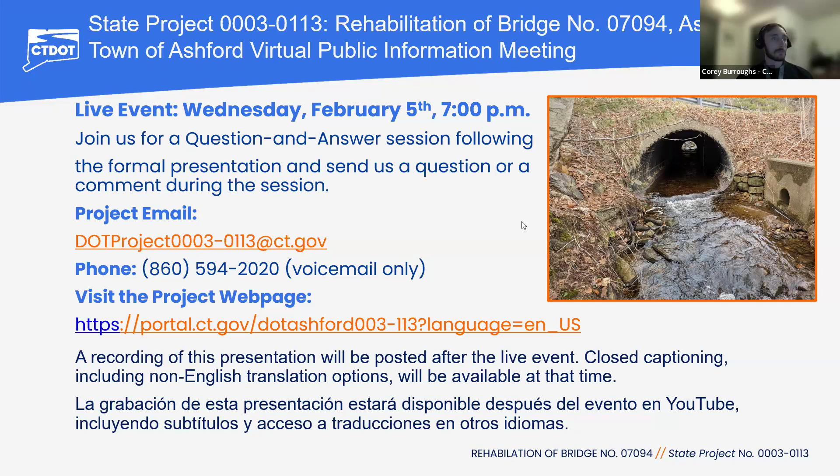The Title VI Civil Rights: no person shall, on the basis of race, color, or national origin, be excluded from participation or subject to discrimination in the development of this project.

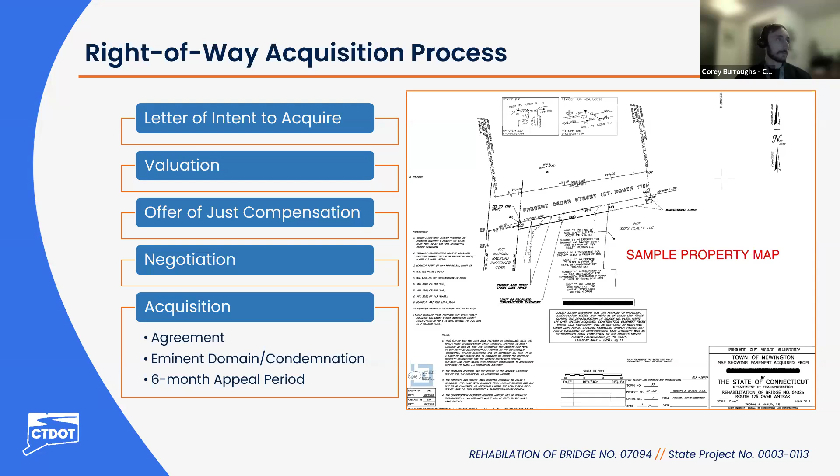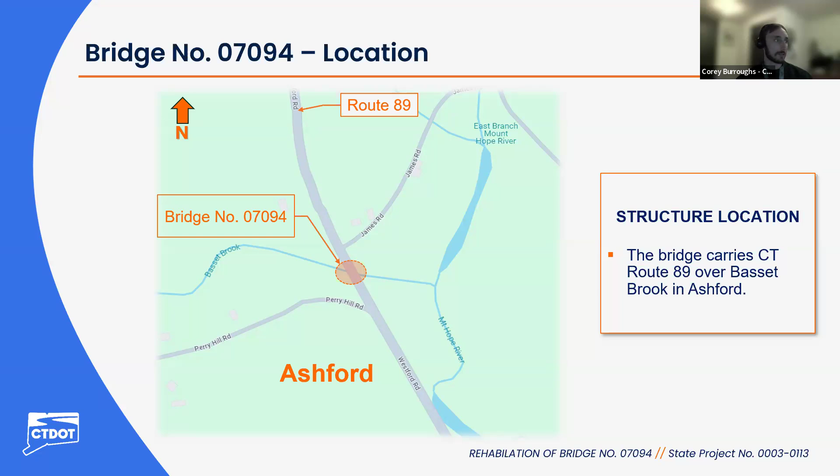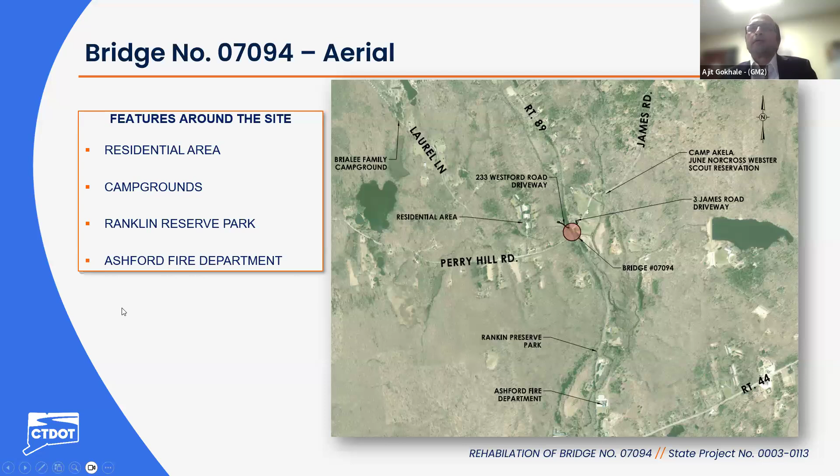It is bridge number 7094. It was built in 1958. The existing structure is an ACCMP pipe, an arch-shaped pipe. ACCMP basically means asphalt coated corrugated metal pipe. It is 8 foot 10 inch wide at the base and 6 foot 1 inch high, and it's 98 feet long.

Route 89 over the structure carries 2 lanes, 1 lane in each direction. The average daily traffic is about 2,800 vehicles per day. The overall width of the roadway at the bridge is 38 feet, and the out-to-out width is 43 feet 8 inches. Next slide, please.

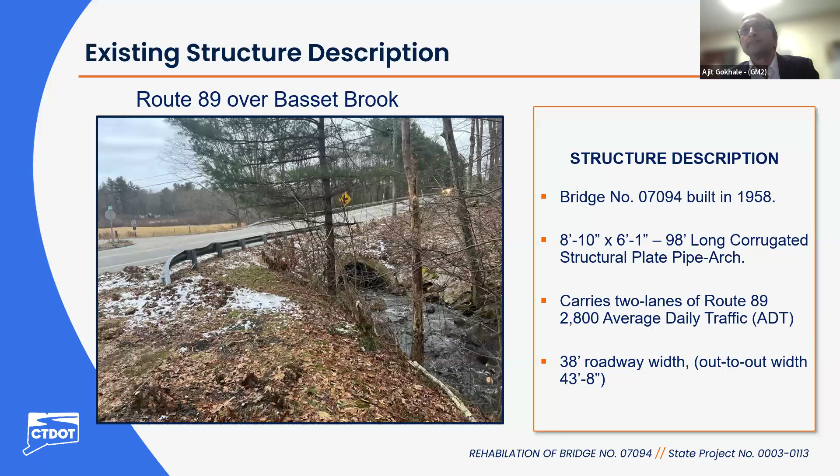What you see on the upper left corner is the inside view of the pipe, which shows some heavy rust along the joints. On the upper right corner, there is a portion which has a sort of a splice or a patch inside the culvert, probably done during the original construction of the pipe culvert. On the lower left, you see some portions of the bolt and the joint with missing coating and heavy rust along the interface from the vertical to the horizontal.

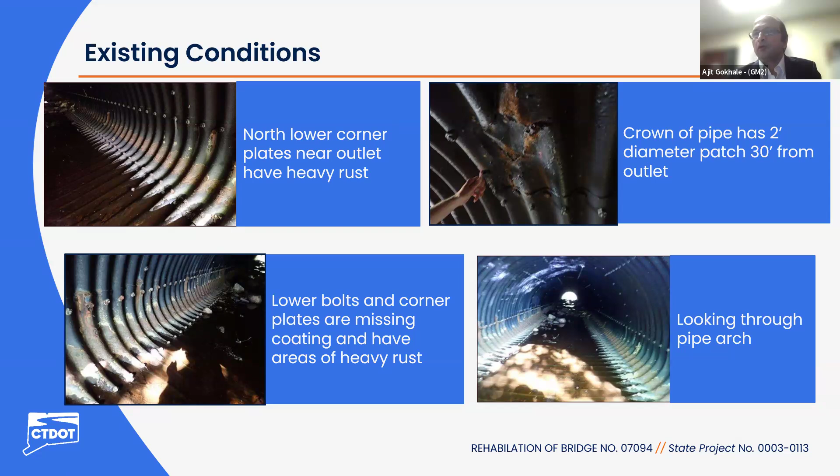The lower right is an overall view of the pipe seen from one direction. As you can see, the bottom of the pipe is severely corroded, and we want to address this problem in this project. Next slide, please.

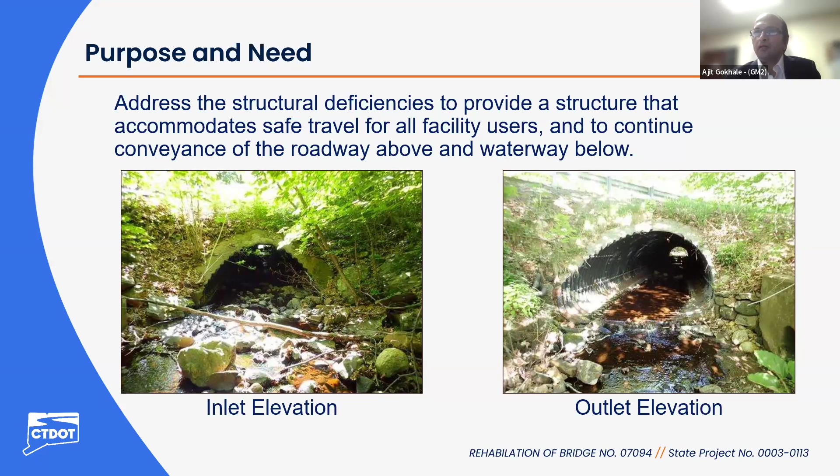So the purpose and need of the project is basically to address the structural deficiencies and to provide a structure that accommodates safe travel for all facility users, and to continue conveyance of the roadway above and water below. What you see on the lower left is a close-up view of the inlet, and on the lower right is the close-up view of the outlet elevation. Next slide, please.

The goals of the project: currently the condition rating of the pipe or culvert is 4. Any improvements or replacement we do, the condition rating will be improved to a 7, which is good to excellent condition. The other goal of the project is also to improve the hydraulic capacity of the pipe, in other words make it larger so it can allow the passage of more flow. Also maintain sufficient load capacity for all vehicles, so the new structure will be able to carry the live loads without any structural issues.

The solution here is to replace the existing culvert with a new precast concrete box culvert. Next slide, please.

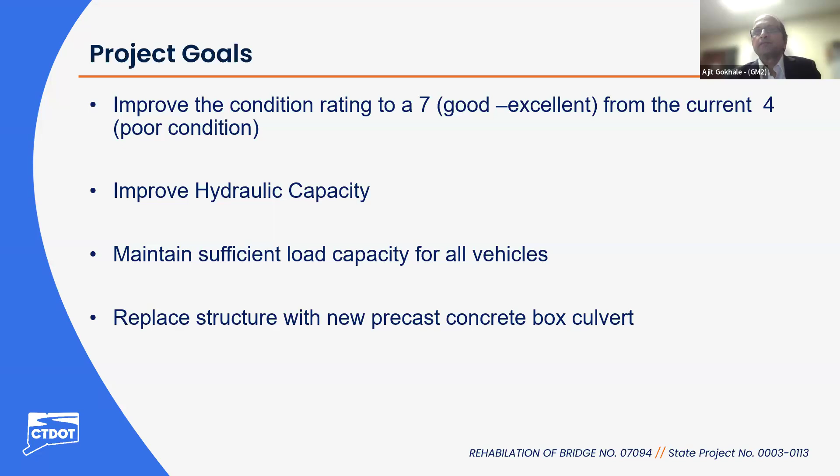So what you see on the screen is the overall site plan of this proposed project. The yellow basically designates the limits of the project along Route 89 as well as along James Road, and that is going to be new pavement, raised by about a couple of feet from the existing profile. The dark brown or orange in plan view is the new culvert structure that will replace the existing pipe. The little walls at the inlet and outlet are the wing walls of the structure, and the blue denotes Basset Brook, which flows from top to bottom, or upstream to downstream, north being towards your right. The red lines denote the existing right-of-way owned by the DOT, and our goal is to build a new structure within that existing right-of-way.

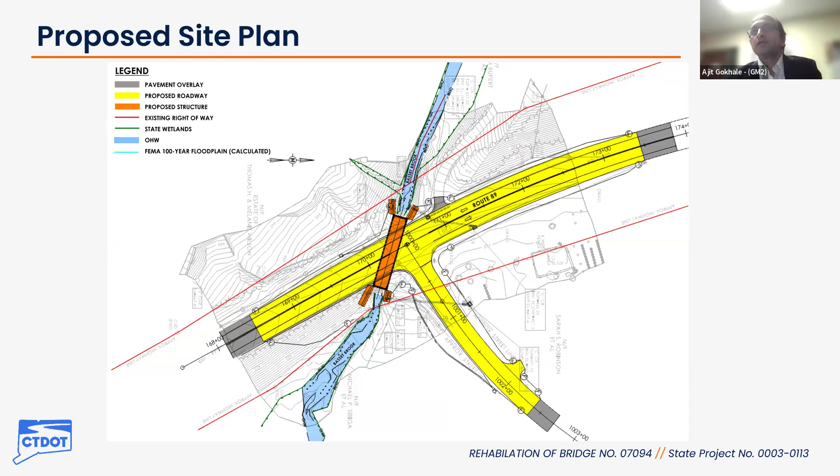This slide shows an engineering drawing of the site plan you just saw. In a nutshell, the gray denotes the limits of the new project and the new pavement, the light gray denotes the existing pavement, and the green denotes the proposed shoulder. The new shoulders will be widened, with this portion of the project having 7-foot shoulders compared to the existing 6-foot shoulders.

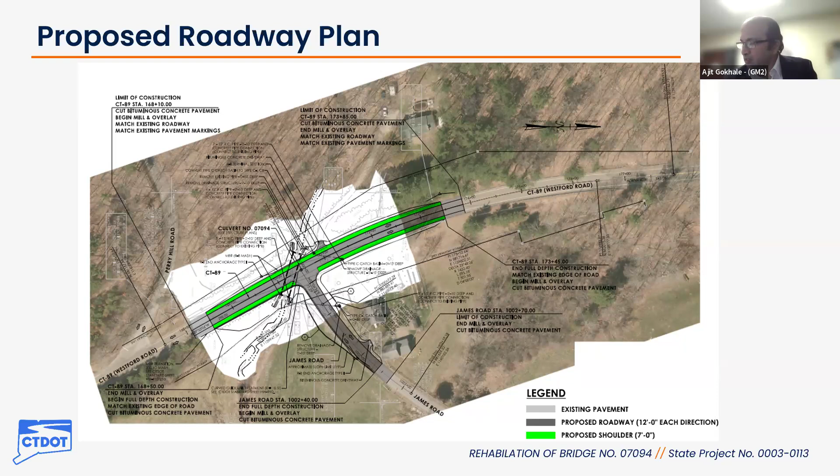This is a close-up view of the proposed culvert, what you saw in an earlier slide, just zoomed in. This is going to be the new box culvert, 15 feet wide by 8 feet high, which is the clear opening inside. You can see the four wing walls, one at each corner. The brook flows from left to right. The red lines again denote the existing right-of-way, or the space available to build the structure within the state's right-of-way. There's traffic shown in each direction on Route 89, so this would be the final footprint of the structure in plan view.

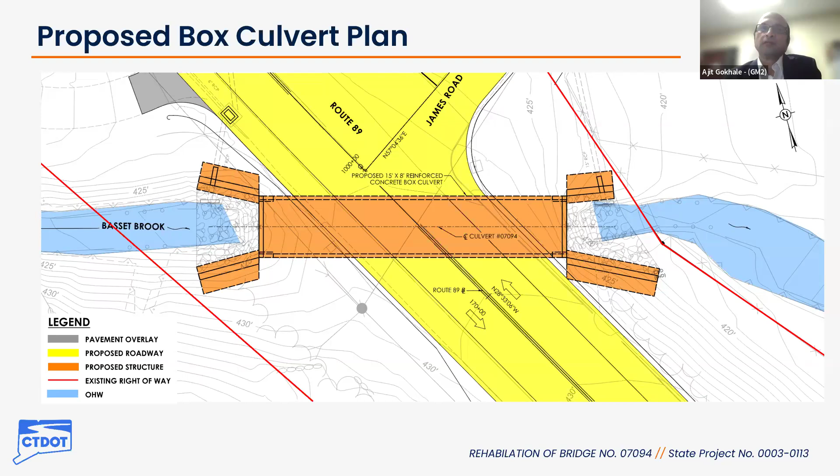This is a cross-section of the proposed structure, or the proposed culvert. As I said, the box culvert will be 15 feet wide, as you can see in the picture, and 8 feet high. The bottom of the culvert will have natural stream bed material about 2 feet thick placed on top of the bottom slab. This view is a typical cross section of the proposed culvert. Above the culvert is the new metal beam rail that will be placed at the end of the project, shown here just conceptually.

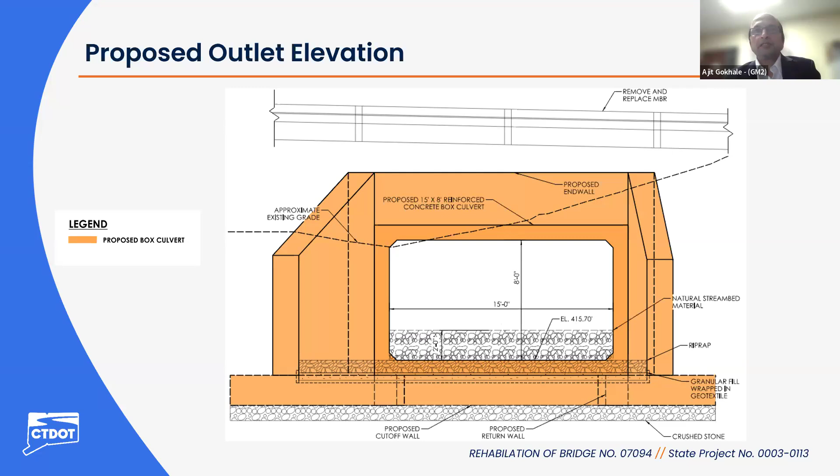This is a longitudinal section of the proposed box culvert. Again, the brook flows from left to right in the picture. The proposed culvert will have a 2% slope, pretty much matching the slope of the existing Basset Brook. Shown in green above is the fill over the proposed culvert, about 4 feet of fill above the box culvert. In the final condition, Route 89 within the project limits will have two 12-foot lanes and two 7-foot shoulders. The culvert will be about 86 feet long.

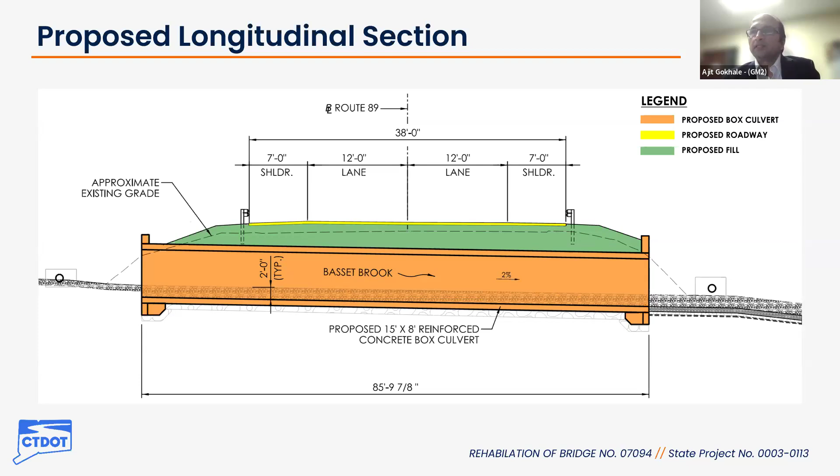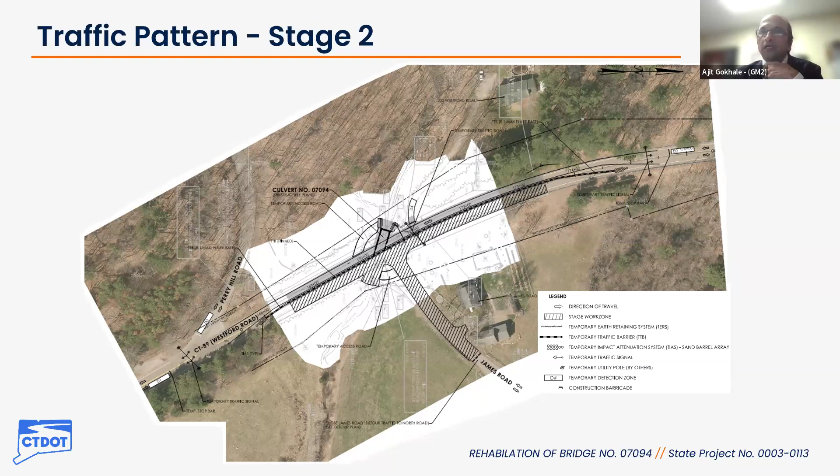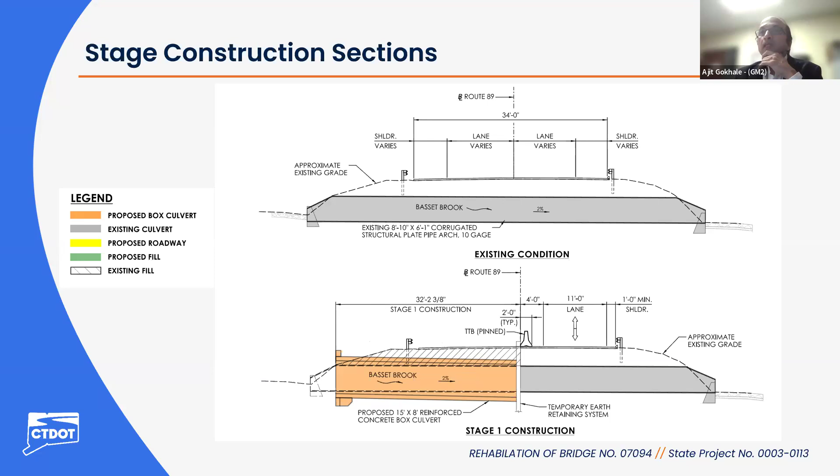New metal beam rail will be placed along each side of the culvert. Culvert head walls, closure walls, and all finishing work will be completed, and traffic will be opened in the final configuration with one lane in each direction. You'll have two 12-foot lanes within the project limit and 7-foot shoulders.

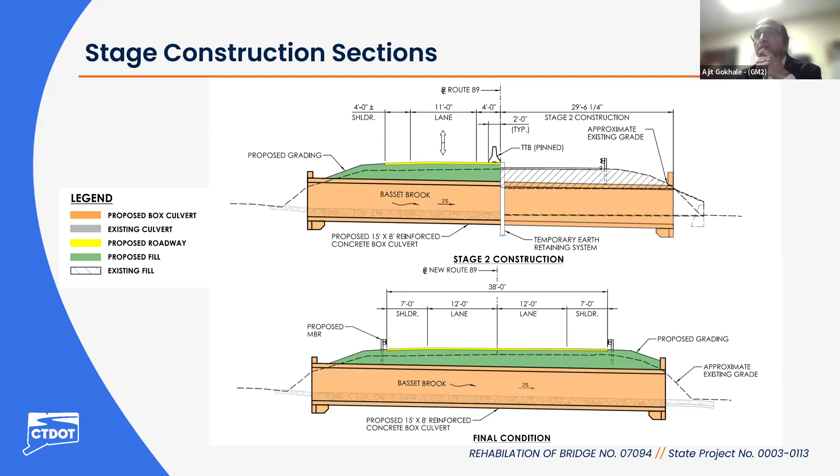During stage 2, when there is work to be done on James Road, local traffic will be allowed to travel on James Road so residents living adjacent to the project can access their property, but through traffic will not be permitted. Through traffic is proposed to go along a local detour route along James Road, Horse Hill Road, North Road, and Route 44, back to Route 89.

This loop takes approximately 14 minutes to travel under normal traffic conditions and is about 8 miles long. The detour is anticipated to be in operation for about 2 weeks. Route 89 traffic will not be affected during this portion when the James Road detour is in operation, so traffic on Route 89 will continue in a one-way alternating pattern as required during stage 2.

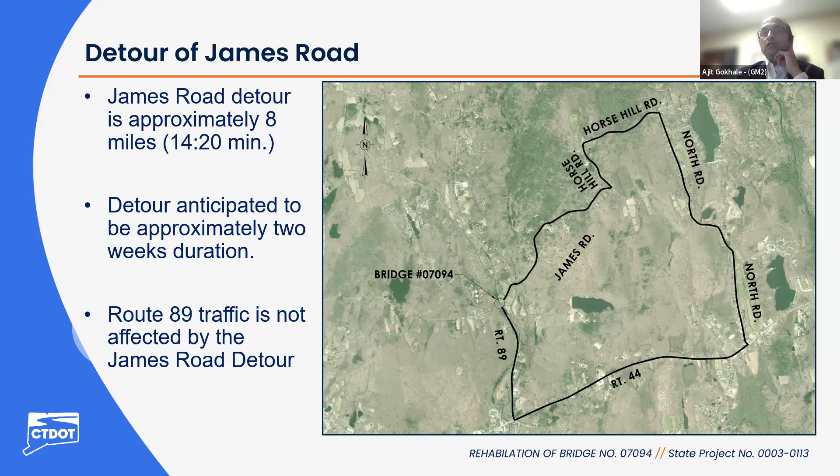Some additional project considerations for building this culvert, like many other projects, are utilities, rights of way, and environmental issues. There are existing utility poles along the west side of Route 89 that will be temporarily relocated during construction. The exact relocation plan has not been detailed; we'll be meeting with the individual utility companies to discuss possible relocation. The reason for relocating the poles is so the contractor gets enough headroom or overhead clearance to operate equipment during each stage.

Once temporary relocation of utilities is done in the initial stage, the contractor can work freely without overhead interference or clearance issues. For rights of way, we anticipate temporary easements for this construction, limited to temporary work areas on the upstream and downstream sides. The exact determination of right-of-way impacts hasn't yet been designed, but that's a process we follow during the design phase. We anticipate temporary easements and nothing in terms of major permanent takes.

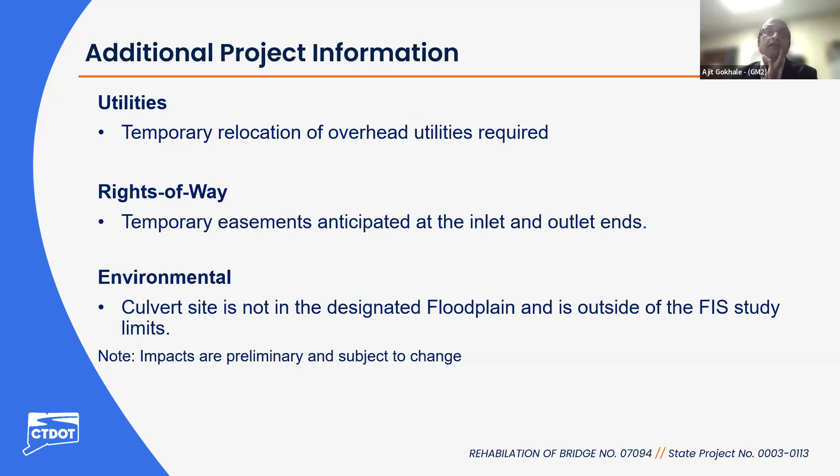The preliminary schedule and cost: the anticipated construction start is April 2028, with end of construction in November 2028. We anticipate a full construction season to complete this culvert. The anticipated construction cost is 3.9 million, funded through 80% federal funds and 20% state funds, with no town funds involved in this project.